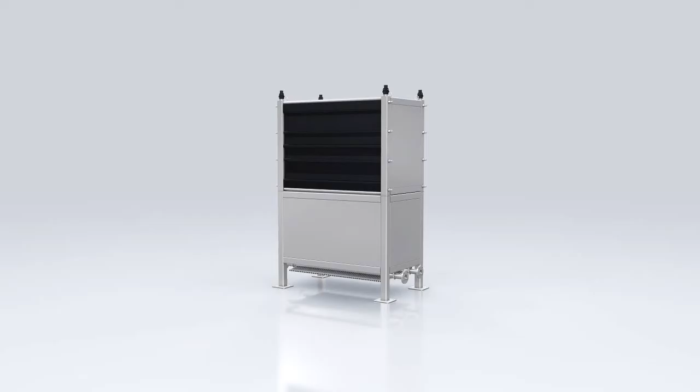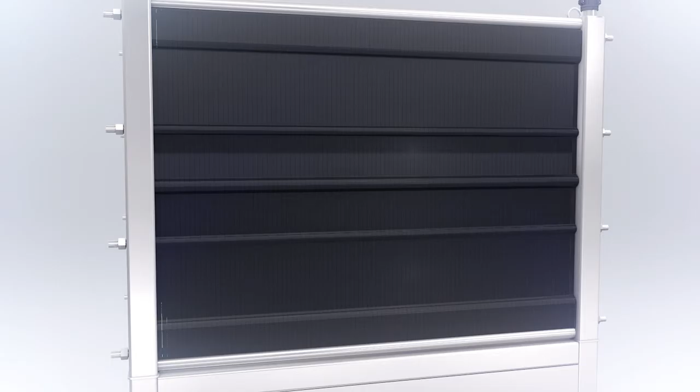Excellent immersed MBR module. Its essence lies in working under lower transmembrane pressure. XMBR, Tubular Array Membrane, is a new patent design MBR module. The first feature of it is the extremely lower transmembrane pressure. XMBR is likely the lowest transmembrane pressure running module in the world.

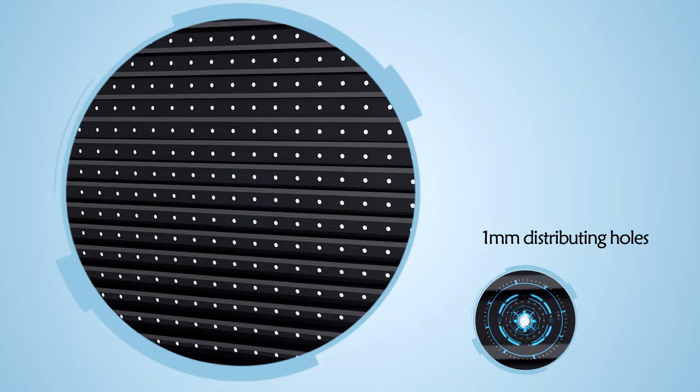The flow path structure inside one piece of tubular array membrane element is a 0.4 micrometer pore PTFE hydrophilic film, with 200 parallel lines of tubes arrayed on the inner side base plate, each 5 millimeters wide. Internal to the film and tubes, and along two sides of the tubes, there are numerous tiny distributing holes of 1 millimeter water assembling holes.

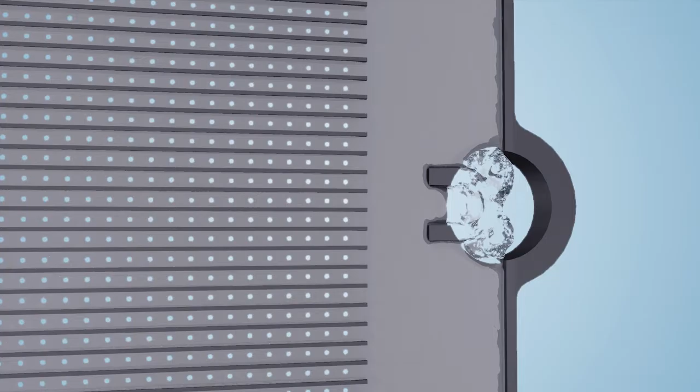The permeated water passes through the film, and ranks of water distributing holes flow over to tubes, going horizontally and parallel into the water vertical channels at two side edges. Each channel has 3 produced water outlets of 25 millimeter diameter.

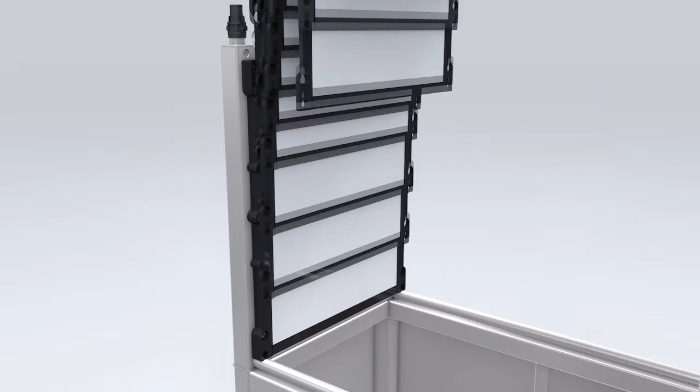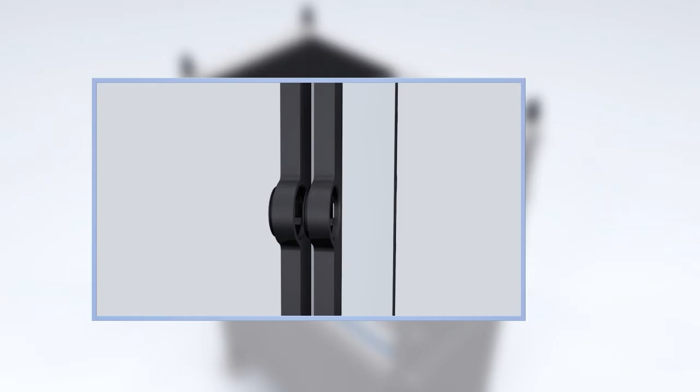Pieces of membrane elements overlying construct the membrane module. Produced water outlets intercoupling form 6 groups of purified water passage, converging water to the confluence water pipe of 50 millimeters at 4 corners.

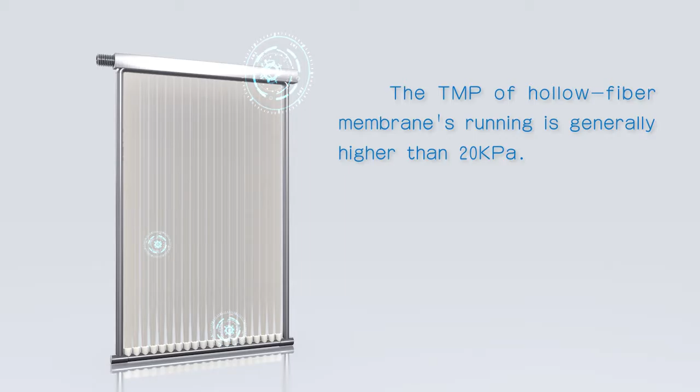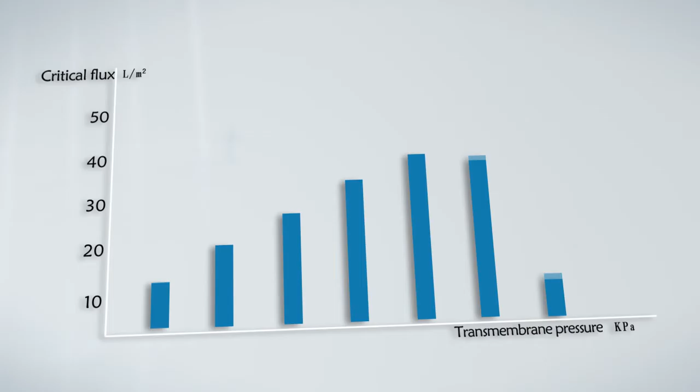Compared with XMBR, hollow fiber membrane or other flat sheet membranes require higher transmembrane pressure when working. As everyone knows, the higher the TMP, the bigger the permeate flux. What if the permeate flux is the same, but the TMP is higher? This can only illustrate that this membrane, membrane element, and/or membrane module has higher resistance to the water flow.

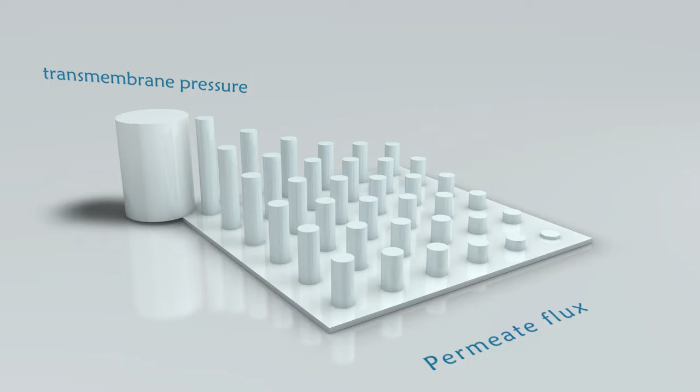The sectional permeate flux is maldistributed. Partly the flux is higher and partly is lower. It shows a gradient distribution. On the contrary, the lower the TMP, the more even the flux distribution.

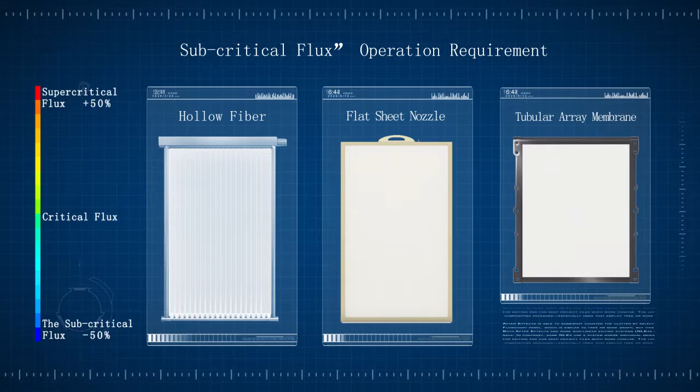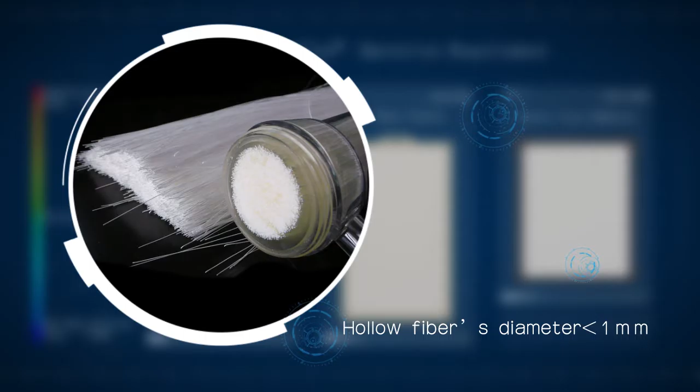We know that the operation must work at sub-critical flux. Due to the hollow fiber's diameter being too tiny, along the length direction, the permeate water to unit membrane area is certainly not even, and the previous flat sheet membrane normally has 1 or 2 nozzles of water flow path. The nozzle's diameter is restrained by the frameboard's thickness.

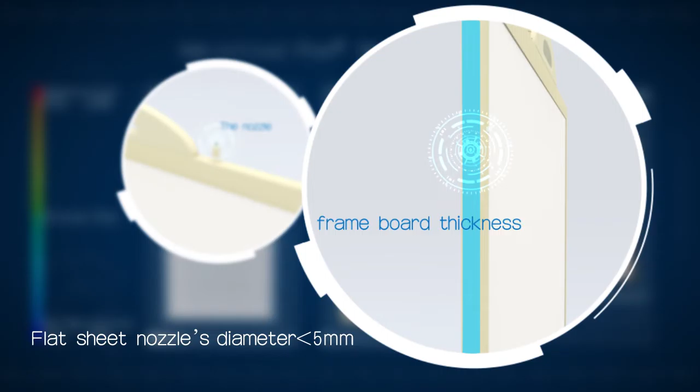The nozzle not only limits the water effluence, but causes the permeate flux nearby to be extremely higher, even higher than the critical flux, whilst the flux at far distance decreases gradually, and the furthest corner from the nozzle could possibly have no water filtrated.

Due to the permeate flux maldistribution, clogging often happens at the nearest place around the nozzle of the membrane element. At this area, the membrane is working at overcritical flux. The earliest clogging to hollow fiber happens at the root of fiber connecting to the water effluence pipe, whilst the earliest clogging to flat sheet membrane happens at the nozzle's nearest place.

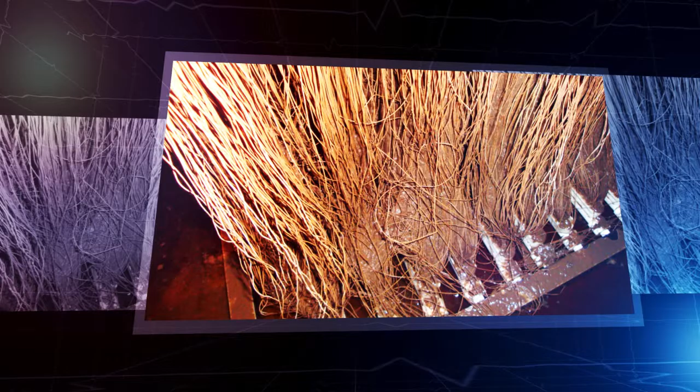Afterwards, constant permeability operation will drive the clogging area to swiftly enlarge and extend. After part of the area is fouled, the effective filtrate area is reduced. To ensure constant flux, it can only increase the permeate flux from the other section to compensate. Therefore, these phenomena of working upon overcritical flux and uneven flux distribution become even more serious, leading to more rapid fouling.

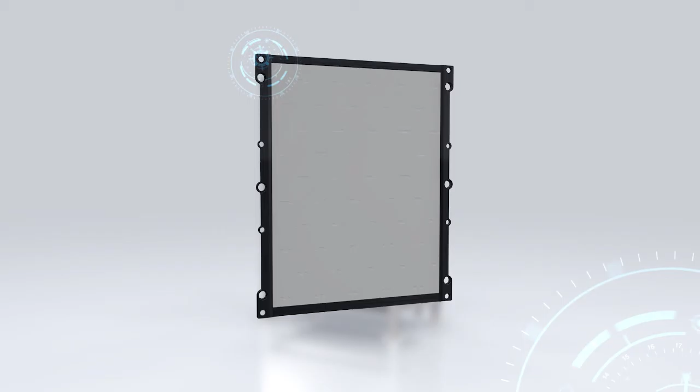Until it brings a disaster of membrane fouling accident. By creative design, XMBR owns a gradually enlarged effluence path and extremely lower resistance loss, working under lower transmembrane pressure. Having solved the above-mentioned difficult problems, XMBR is less likely to cause fouling on the membrane and can keep stable filtration operation. Meanwhile, because its sectional permeate flux is even, the working area of the membrane is nearly equal to its installed area. The average flux value can be taken higher, or the aeration intensity value could be taken lower.

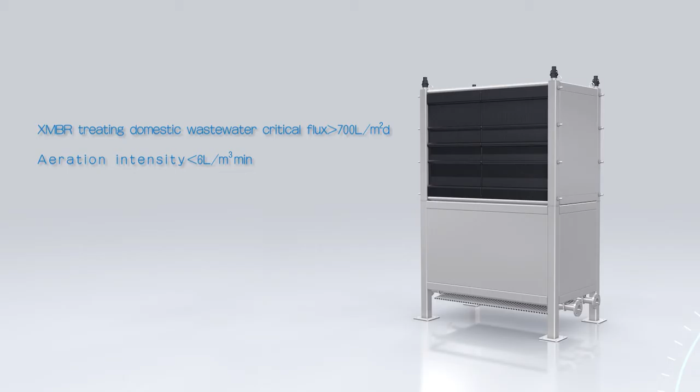Now let us learn XMBR's actual operation through a design case study.

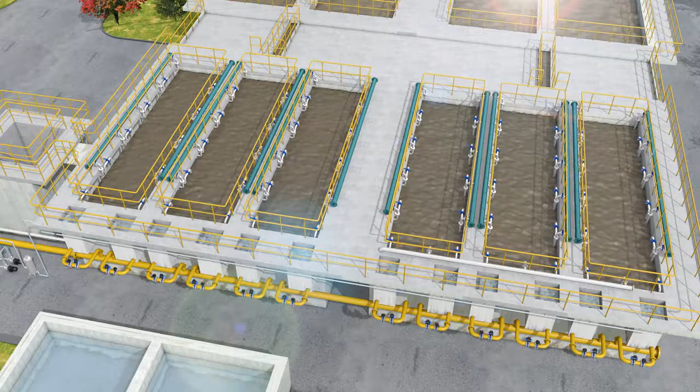This is an MBR system treating oily wastewater of 4,320 tonnages daily, adopting 60 sets of XMBR modules. Installed inside 6 tanks, with 10 modules in each tank.

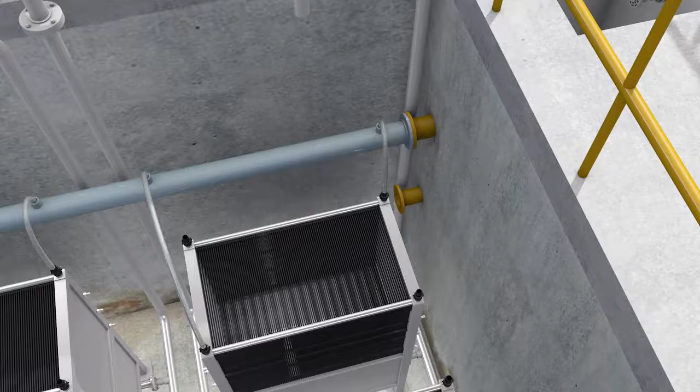Every 5 sets of XMBR 200 is connected to a produced water pipe towards a TMP tank, and 12 TMP tanks' produced water converges to a confluence pipe. Each set of XMBR 200's other 2 joints will connect to the cleaning return flow pipe. This pipe eventually leads to the cleaning tank.

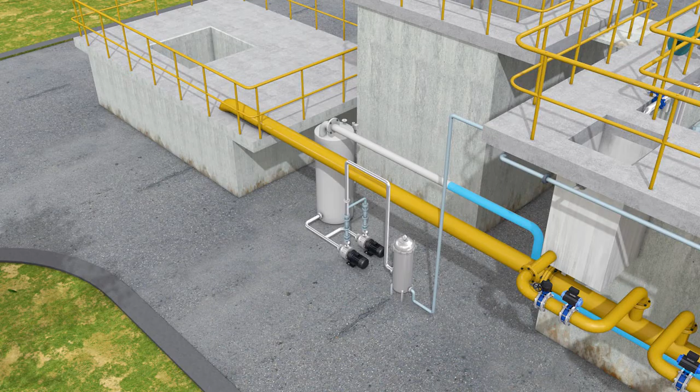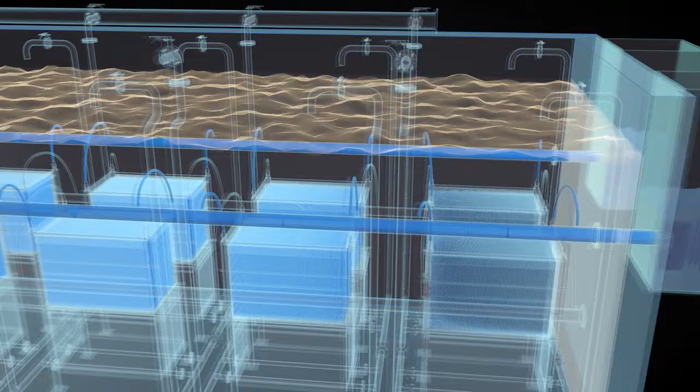When XMBR is working, the TMP level control valve can be adjusted to define the transmembrane pressure. The operation relies, and only relies, on the drive of transmembrane pressure, which can drive the mixture in the tank to permeate across the membrane, entering into the effluence path inside XMBR, and then produced water flows along the produced water pipe into the TMP tank and then to the confluence pipe.

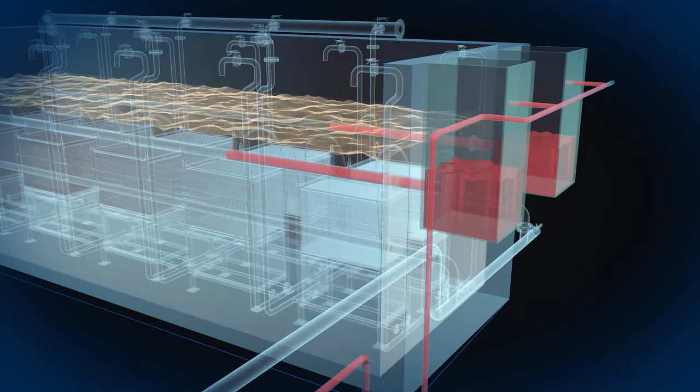When MBR requires cleaning, the produced water valve is turned off, the TMP tank is at a higher liquid level, and the cleaning pump sends the prepared cleaning liquid from the cleaning tank to the TMP tank. Relatively, a level difference is formed between the XMBR tank and TMP tank. The liquid flows into XMBR, scours the membrane surface, soaks and dissolves the membrane pores, and then permeates through the membrane. The remaining cleaning liquid returns to the cleaning tank through the pipe, and the cleaning pump implements stronger recycle washing.

The above equipment has overcome various disadvantages of previous industrial wastewater treatment MBR systems, ensuring the system's stable and durable operation for the long term.